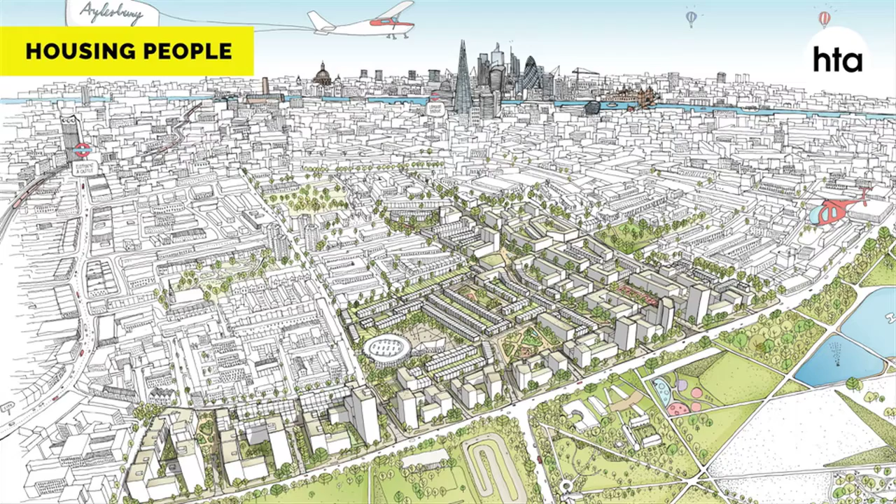Just a bit about us. We're 185 staff and we're in quite a few cities, and we're a housing practice. We only do housing, so we're quite specialist in that regard. We house people in a variety of places. We work in regeneration, a difficult area at the moment, a very politically charged area. This is the Aylesbury estate in Southwark. Has had a lot of press, but ultimately is progressing and is about delivering better housing for the communities that live there.

We try and work with house builders. Volume house builders are delivering a lot of our housing. They get an awful lot of bad press, and they have done a little bit today, but we try and work with them as best we can to deliver the very best possible outcome for housing people through better design, adding value through design, demonstrating that architects have something to offer.

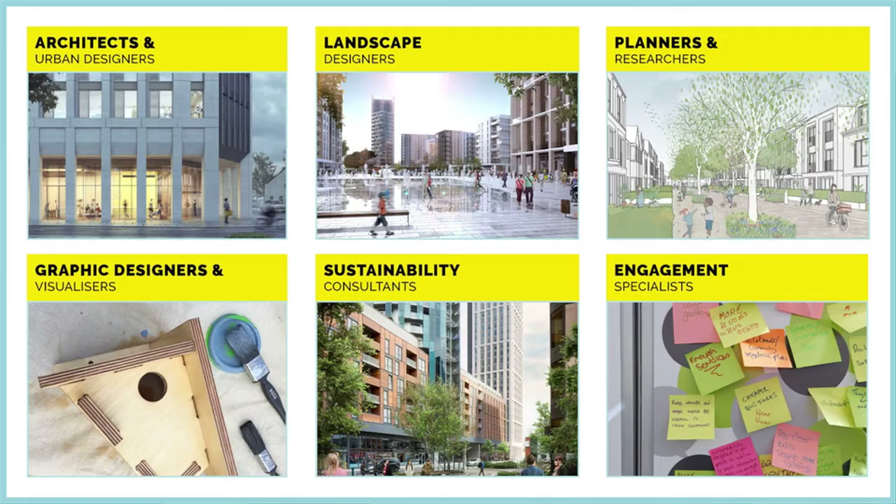We're architects. We're specialists in that we're housing people, but we are architects, landscape architects, planners, researchers, graphic designers, visualizers, web designers, sustainability consultants and engagement specialists, but all in the world of housing. So I guess it's not that surprising that we have focused over the years on particular areas of specialism, because our reach, if you like, in the design world is possibly narrower than many practices would ordinarily go for. So our roots in off-site construction and focusing on modular build, which will be the main focus of today, go back quite a long way.

I joined the practice in 1998. This scheme had just been won in competition. It's Greenwich Millennium Village, GMV. It's not really associated with our practice particularly because we were sacked. Because it was a huge disappointment in delivering the expectations of the bid, that it would be modular, that it would be built rapidly, that it would be very modern, flexible, dynamic, that you could move into a one-bedroom flat and then expand to a two-bedroom and then increase to a three-bedroom, a maisonette. The whole aspiration of sustainability was embodied in this project, which is why I went to work for the practice that I now run.

As I say, it was a disappointment. It's concrete frame, it's very inflexible, it's sold off in the normal way. But a lot of the ideas that were put into that originally have developed through the practice, through our thinking, through the projects that we pursued and the ideas that we have explored.

We had a bit more success at the suburban level. It's kind of easier, it's less risky. People are a little bit more inclined to have a go, and there's a few more housing associations in amongst the mix, and they've always been quite good at trying a risk or two. Think about Peabody, Murray Grove, those sorts of projects where they were almost bankrupted, but they did disrupt the industry and change the future.

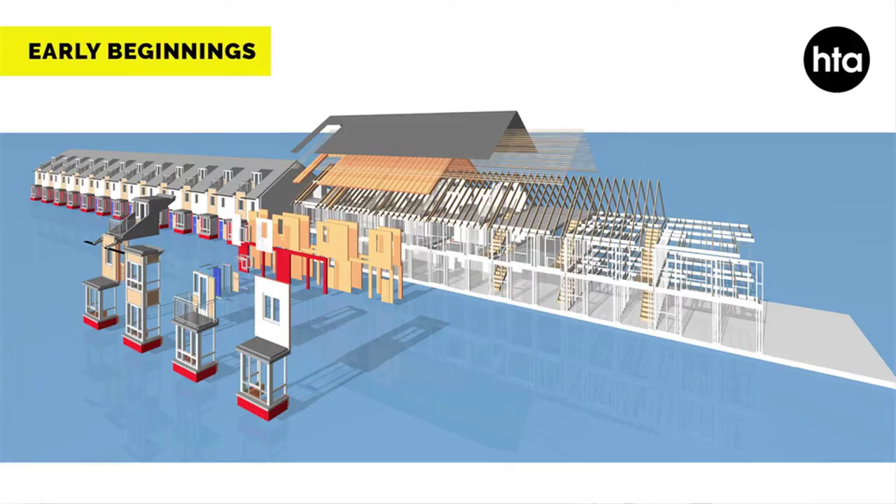So this was an early custom-build prototype. This is in Basingstoke. Two-storey housing, regeneration, replacing an existing estate. The idea being, you can see at the bottom there, you could get your standard steel frame house built in the factory to the highest quality, and online you could buy a bay window or a double bay, a dormer window, all those sorts of exciting features, and you'd pay a little bit more, and the outline consent would cover any variety of possibilities so that the individual purchaser could do it.

Now, the website wasn't very successful because websites weren't very good back in the early 2000s, and the planning authority wouldn't accept anything that wasn't fully designed at 1 to 10. So we didn't actually get the consent that we were pursuing. It didn't really work. But then again, the idea was there, the thinking that pervaded through the future work in the practice got us going.

Actually looks like quite ordinary housing. It is quite ordinary housing. It was affordable housing for a Basingstoke Housing Association, but it's very high-tech. It's steel frame inside, and the various elements were built as elemental parts in factories around the southwest and brought into site in different combinations.

The tide began to change in our favour a little bit. We thought, right, we're onto a roll here, and John Prescott brought out the Design for Manufacture competition. Some of you will recall it was the 60K house. It got subverted a little bit, but it was launched as the Design for Manufacture.

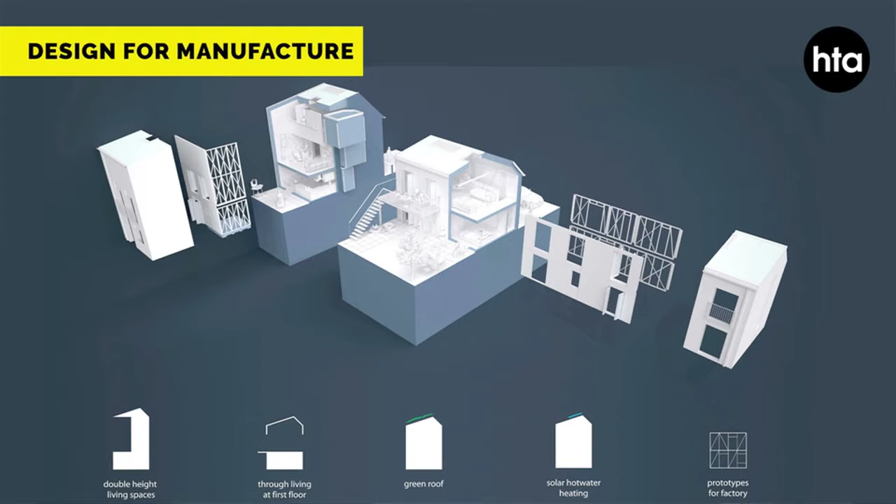We got together with Barratt Homes at the time. We just started to try and work with them as a house builder. They had the advanced housing system in Northampton, which was a joint venture with Terrapin, and we developed a whole set of modular approaches with panels and pods that would configure in different ways to design and deliver housing of ultimate variation and flexibility.

So we worked through the planning stage of both projects that we had secured through the competition. During that period, they closed the advanced factory, withdrawing from off-site manufacture altogether, but we did get into a relationship with a third party, Kingspan at the time, who helped deliver it all. And we learned some lessons, and we built some pretty good housing with a house builder, which won quite a lot of awards and was very well received.

That took us then on to a sort of step, and just goes to show how slow and how long this can take. You know, start with a small idea, have a few failures, pick yourself up, try it again, keep assessing your idea for its legitimacy, for its commercial value. Is it adding anything to the development process? Or is it just design ideas? Are you making a house bigger than it needs to be, rather than actually working to make the house as good as it possibly can be within the limited space that you have?

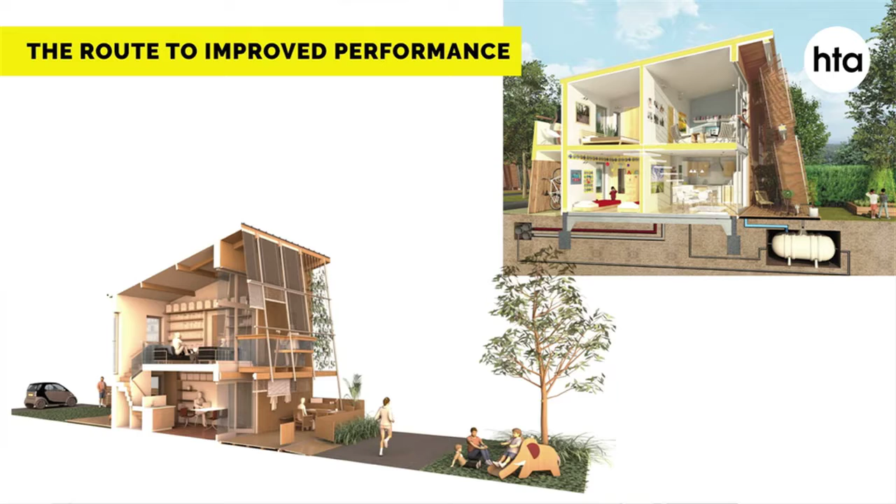So we went on to do the Carbon Challenge, another John Prescott initiative, and we did this again with Barratt, and this time we had Kingspan in the room from the outset. So we set off, we had a bid idea for how the housing would be reorientated. There were loads of other factors in terms of the first Code for Sustainable Homes Level 6. It was the first of 6 much trumpeted Carbon Challenge sites. This was in South Gloucestershire, just on the outskirts of the city. We developed that through the process.

Into a different arrangement. What the first house shows is that architects always like to turn the house upside down. They put the bedrooms on the ground floor and the living room in the roof. You can have a cathedral ceiling, make the most of the volume. That's a way of adding value. House builder's not so keen. It's a bit risky. I'm not sure. Will anybody buy it? They always do, by the way. We do it all the time. They always do. So we flip them on the side.

And the first version in the bid put all the living rooms to the front. That was a great idea. You looked out onto the street. Bedrooms to the back. The actual version we built in the end down the left-hand side flipped them about 90 degrees. So the living rooms were both through rooms, front to back, and the bedrooms were side by side through front to back as well. So we've got extra cross ventilation, actually much, much simpler to build.

Barratt did a very clever thing. They handed over the responsibility for the building envelope to Kingspan, so they delivered all the windows. They had to achieve the air tightness. It was a punishing 1.5 target. We managed 0.8 in the very first house we built, and every house went very straightforward since then.

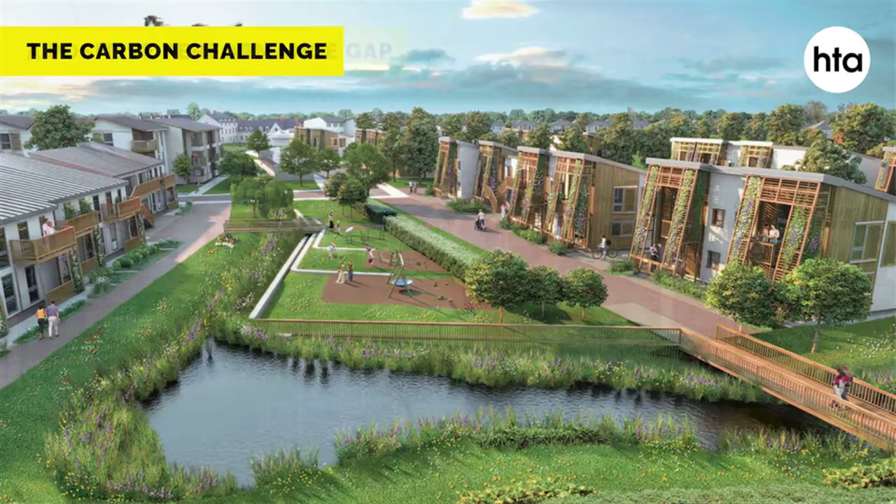We did a beautiful CGI, which then actually had to be delivered as the final scheme. Slightly different angle. We need to get back with a drone and take the aerial view. But it outperformed in every performance area that we were expecting to. And we expected these to be rolled out across the country as the new answer to suburban housing. It's probably the only one that exists at the moment. You don't see them anywhere else, but the core of the house has begun to emerge and be developed in other areas. So again, slow steps, use your ideas, get them built in small areas, and then keep going.

So at the time then, we were looking at different formats of construction. There's the basic brick, that's an off-site manufactured element. There are frame systems, there are panels, and then through to smaller pods, and overall volumetric, where the entirety of a room or a part of a room is fitted out in a factory and brought to site.

These have what we call pre-manufactured value, and at 40%, most buildings are about 40%. You have quite a lot of things like windows and bricks that have already been made in a factory, through to modular, where still quite a bit of concrete might be done on site, but a lot of it is done in the factory. That can be up to about 80%.

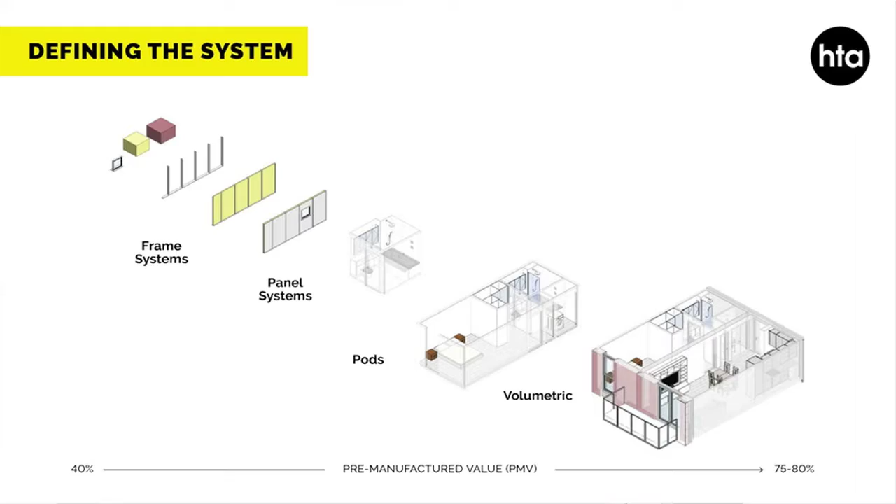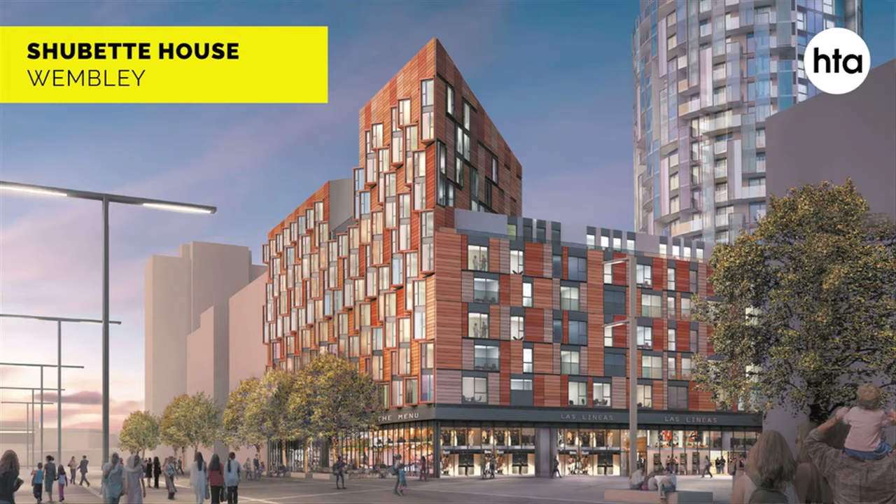So whilst all of that suburban stuff was going, we were working in Wembley, getting a consent for a scheme on the left-hand side, which has quite a good view of the stadium. We're working with a developer who also owned Vision Modular Systems. At the time, it was just about getting a consent. We got that consent, and everybody went quiet because it was 2009. But they came back a little while later and said, actually, we're going to build this now. We're going to build it using the factory that we've now re-established from Cork over in Bedford.

You'll notice it's not very rectangular. There's a slightly oval tower. There's a pointy triangular corner. It hadn't really been designed with modular in mind. It had been designed to maximize the consent, those points to get things like daylight into the courtyard and to maximize the views from the tower. But actually, we designed the whole thing through the modular factory, and it was all built by the modular system. Everything above the grey fascia at the lower level, which is concrete frame up to that point, is entirely modular above. So we managed to do some quite remarkable things.

What that did then was give us a relationship with a manufacturer who sees no benefit in switching his architect from planning to working drawing stage, because during the planning stage, you're spending a lot of your time resolving the complicated issues of layout, of construction, of connection, that will enable the project to be delivered very rapidly after you've got consent. There's no real purpose if you're a manufacturer in getting consent for a project and then selling it on. That's not really going to do much for keeping your bodies in your factory.

So as a business model, we began to see the benefit to us as a practice of keeping close to the projects we're involved in at the early stage, developing that technical expertise from the very beginning of the project, from inception. So we weren't doing simple CGIs of what the project might look like. We were at the same time working out quite detailed layouts of how the project would be constructed. And we took that on to some future phases.

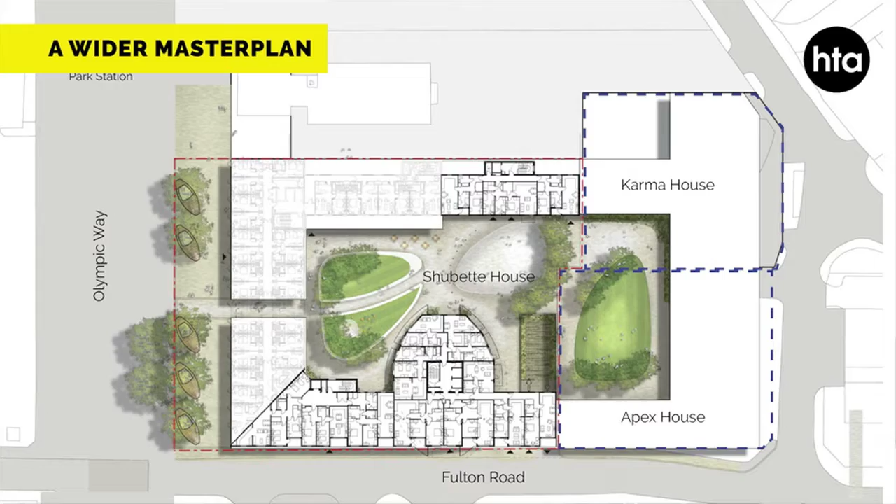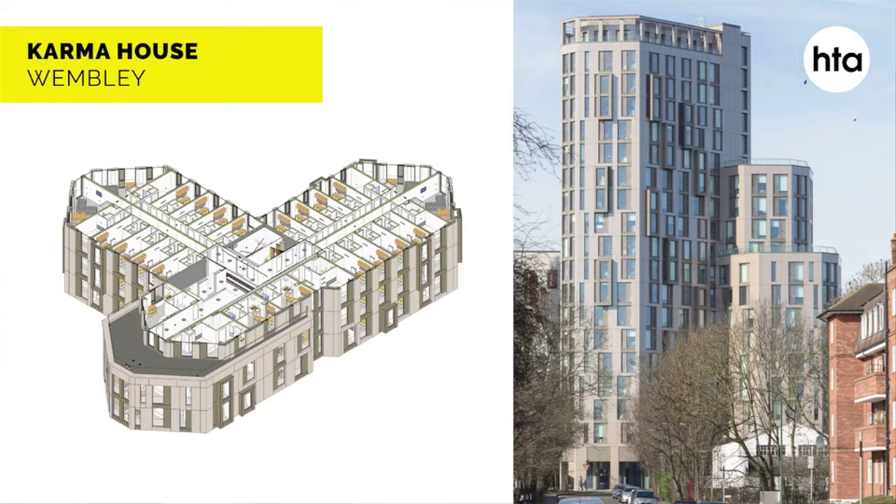So when we were doing the project you've just seen, Shubette House on the left, the council said, well, what we need to see is a master plan for the whole site, to see how you would complete the urban block. We said, well, we'll do that, but it's a bit nonsense. I mean, we're never going to get to build the rest of the block, obviously. So we did. They bought Karma House because they thought, well, we've done a really good job of Shubette. That's going to go really well. We can deliver some student housing.

The previous scheme was a mixture of private sale housing, which was actually bought by a PRS investor, one of the early signs of that coming good, some affordable housing and a hotel. But this was designated for student housing. So as you can see here, not all rectangular modules, some triangles on the corner. This was really driven by the planning consent that existed at the time, that the council wanted us to work within their envelope. So we came up with a scheme. We got a few more stories on top, and we built this in 14 months. It's about 450 student rooms. That was about half the time we'd taken for the previous project.

So the developer and the manufacturer and ourselves were beginning to see real benefits from working together repeatedly. We understood the rules of the system. They were keen for us to push it and demonstrate that modular wasn't "you can have any shape you want, providing it's rectangular." That was what many of the modular manufacturers of previous decades had really suffered from. And these became showcases for how this system could be developed and deliver better accommodation.

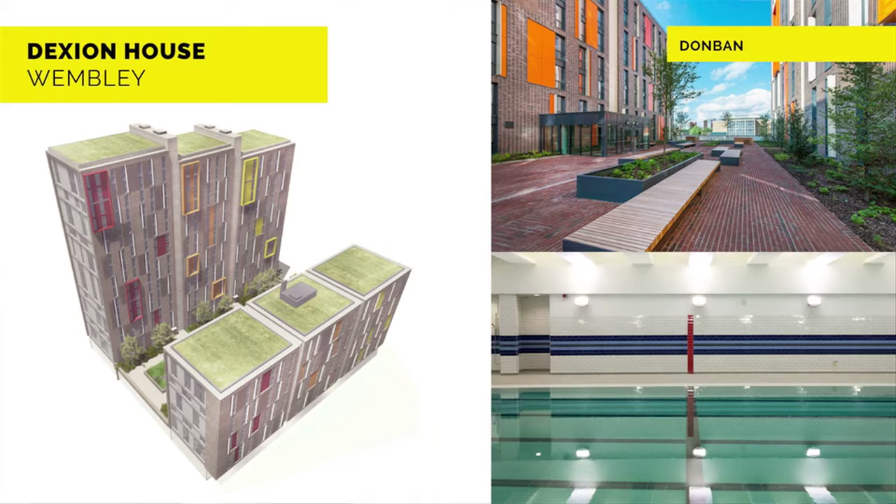And again, in the world of mixed use, as high-density communities in quite central city locations are having to bring together different uses, the opportunity for a modular manufacturer that can create a concrete deck, a transfer slab with pretty much anything underneath it, and then crane on reasonably lightweight modules on top in rapid time, about half the time it would normally take to deliver through traditional build, became quite a benefit.

Also, the floor-to-ceiling in the modular system we were using, floor-to-floor height was about 2.85 to give the 2.5 clear that you require, compared to the 3.1 consent. So we got an extra 2 floors on top within the consented parameters through a Section 73 notification. So those sorts of ways, again representing how the architect brings value into the process for the developer, improving design outcomes, but also improving the commercial return for the developer.

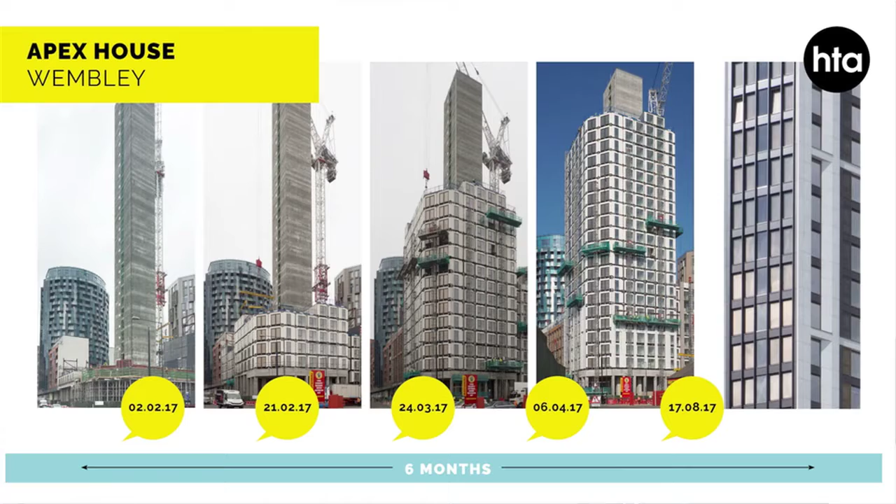At the same time, because you're building it quickly, the crane is very, very busy all of the time. It's usually a compact site, that's best for modular. The crane's very busy loading the modules on, so it hasn't got much time to lift big, heavy bits of cladding. So you have to do all the cladding from mast climbers, you can see on the second left picture, and all of the cladding modules have to be carried by 2 men. So all of those sorts of constraints you get quite used to. You get to learn a little bit about what's driving the building and the design decisions. And actually, that's where the creativity comes from.

The idea that you take a building and then you try and hang on to some of your ideas whilst it gets modularized is entirely the wrong way to look at it. You have to look at it as, these are the key constraints. How creative can we be within that and get the right outcome? That's a typical module. This isn't a technical talk. I can do that another day. The modules are fully fitted internally, and then you can see the corridor is open. So once the modules are all stacked up, the corridors can be finished in one. But the rooms inside have the doors locked in the factory, finished off.

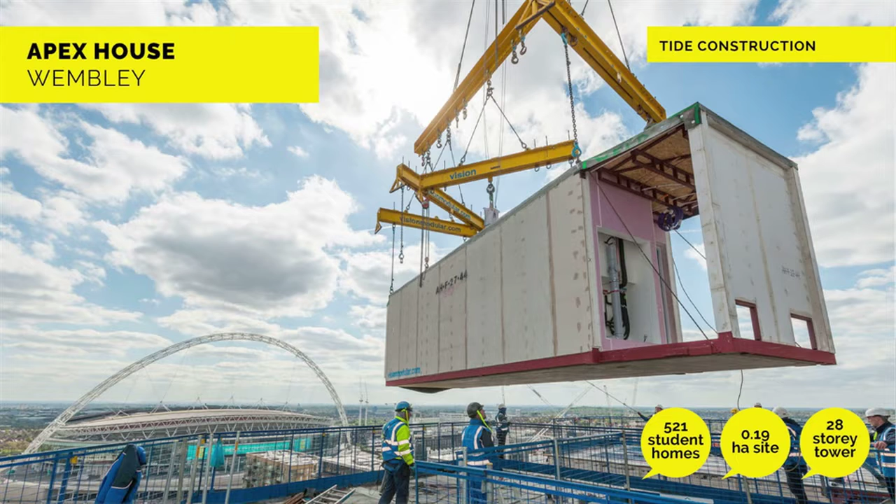And a site like this, delivering, I think, 520 student rooms, about 600 modules, has about 12 people on site. So actually, it's a very tidy, organised site. There's a lot less disruption for local neighbours because the thing happens very, very quickly, and there aren't loads and loads of vans coming around. The local cafe was disappointed because they were expecting hordes of workmen to come and really fill their order books for a year.

And so, as you can see, we did complete the block, albeit Felda House, the second one we did, was quite a different form. But it was an unusual moment to go back and say, well, we started here with 3 sheds and completed the whole lot. And there they are. The spirally thing in the background has nothing to do with us, but it actually was a modular building as well. So Wembley is leading the charge in the modular world, but you can see the 3 other projects that have been delivered by us.

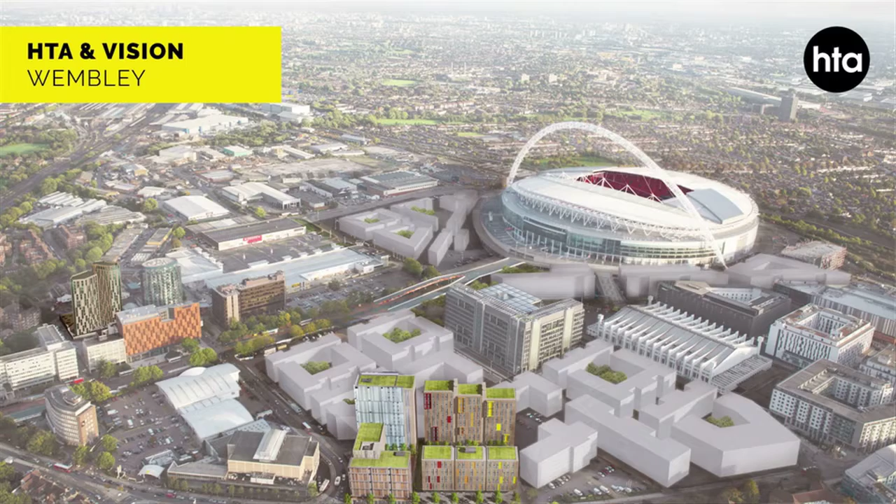So you spend a lot of time doing your production information, your working drawings, and broadly similar amount of time spent in the modular world. And then you get to site with a traditional build, and you spend a huge amount of time, about the same amount of time again, going back, making it slightly less good, dealing with problems from the subcontractor, similar approved materials, can we use something a bit cheaper? We'll have to get back to planning. No one really wants to pay you for that.

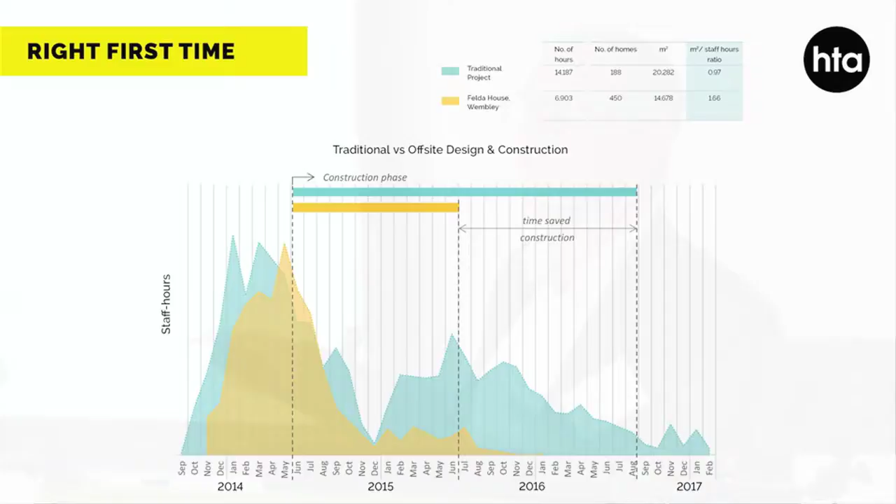You've agreed a fairly light fee, half a day a week for the first six months, and you just bleed the whole lot of fee away. No one really likes you for it. You're desperately unpopular. The modular world is entirely different to that. They have no interest at all in changing anything once they get to site, because that upsets their own supply chain process, which is really well established. You spend almost no time at all, pop along, just check everything's satisfactory, and lo and behold, everybody comes out much happier.

Of course, the canny developers in the room say, does that mean your fees are a bit lower? Well, actually, yes, they are, but we still make more profit, because we actually don't have to spend a lot of time. We don't have to charge a huge amount of time for fees on site, but we would only say they are lower with manufacturers that we're well accustomed to working with, because it's not always the case.

Skills are bleeding out of the workforce. People don't want to work on building sites anymore. They don't want to travel to Kingston for two years and then suddenly have to move to Didcot. They want to stay, put down roots. They want to work in a factory which is nearby, which is warm, which has iPads, which has healthy and safe environments. It is absolutely the future.

And the benefits, it might be a bit more expensive, but if you can finish a student housing scheme a whole year earlier than somebody else, you get a whole academic year of rent out of it. And in Felda House, that was £5.3 million of income. So finally, we began to get quite recognised for this. We won quite a lot of awards, not just for projects, but for our thinking and investigations into this area. So things like the AJ Best Use of Technology, AJ Business Breakthrough.

One begins to see these things converging in other areas. Custom build, I spoke about a little bit at the beginning. That is now beginning to happen. I absolutely agree with Isabel Allen. It's not about the factors that everybody is saying it's about, but the construction methodology is incredibly important. Actually beginning to deliver projects in more sensitive environments, not always being 28 stories. This is in a conservation area, but it's modular build and it's on site at the moment. Making sure that your external envelope can be delivered in traditional materials.

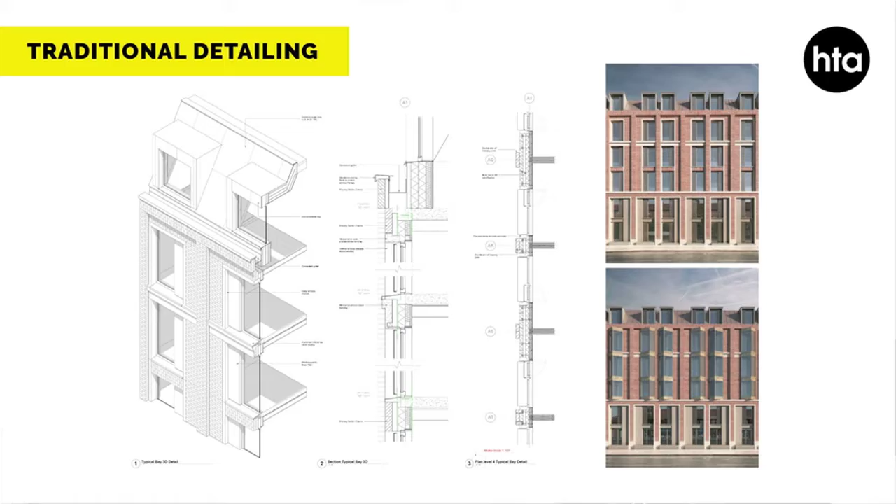Building projects for other people. This is for Essential Living. We didn't design it, but they came to us to help deliver a modular solution. The implications of BIM are quite significant. And there's a module. Looks pretty finished on the inside, but look at the outside. It's pretty low tech. It's not robots building things like Laing O'Rourke might tell you. So actually, there's not a big barrier to entry into this market. And there the convergence obviously lies.

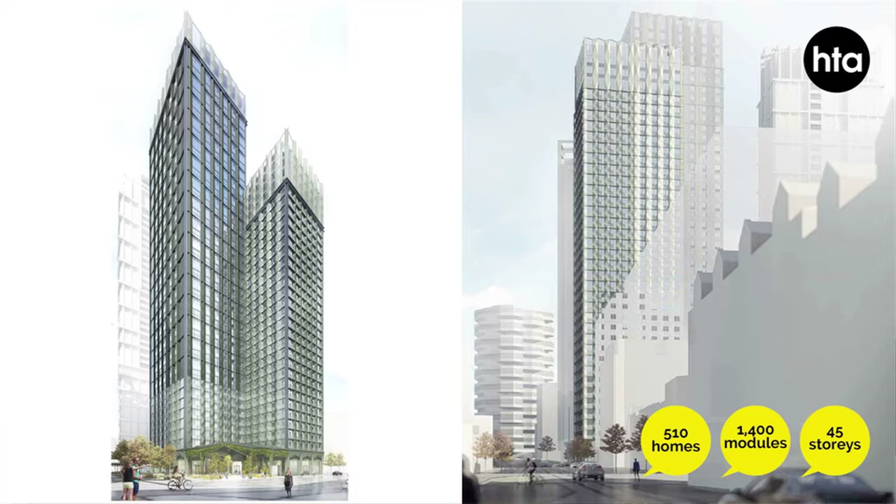Build to rent, the benefit of finishing buildings quickly and early that can then be rented as soon as they're finished. And modular build, where the long-term defects and management costs are much more controllable, is the future. And I'll leave you with our future, which is our current project. So Apex House is the tallest modular building in Europe by height and by stories. Don't let Metropolitan Workshop tell you otherwise.

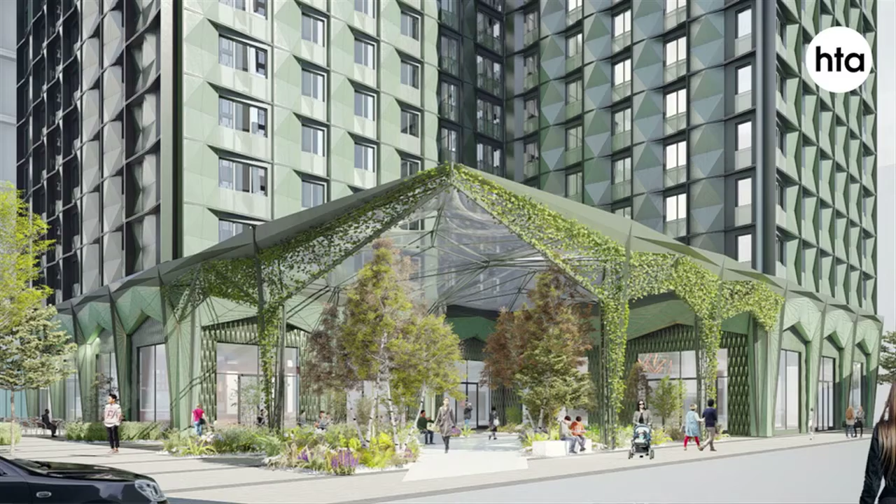This is the tallest modular residential building in the world. It's 45 stories. It's in planning. We're hopeful of a good outcome in a week's time, and it'll start on site a week later. But don't let anybody tell you that because it's modular and because it's built by manufacturers, they don't need architects. They absolutely want architects, and they need them to the core of their business.